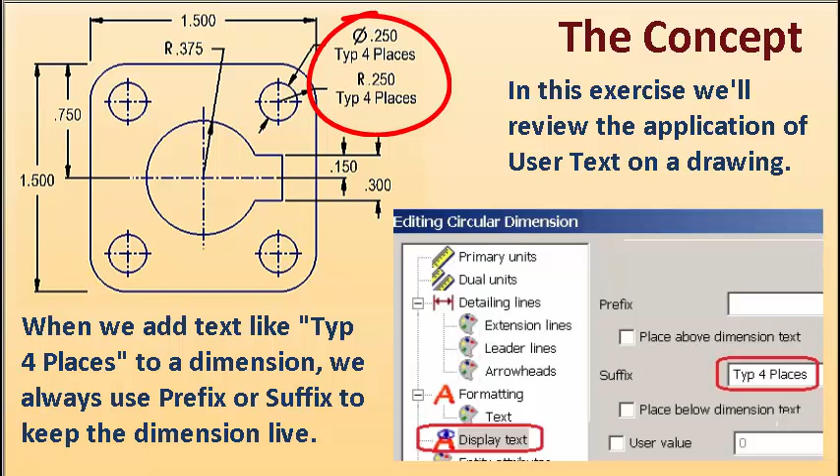In this exercise, we'll review the application of user text on a drawing. When we add text like Typ 4 Places to a dimension, we always use prefix or suffix to keep the dimension live. We would not employ user text in these cases. We'll look at an example where user text would be an ideal option.

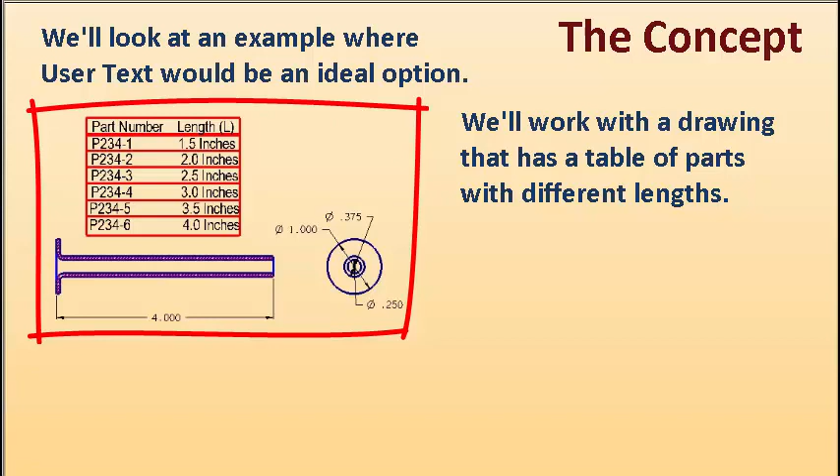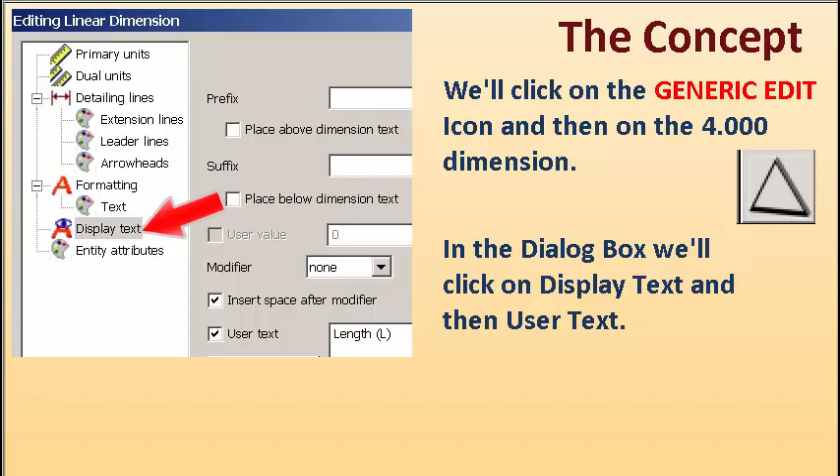We'll work with a drawing that has a table of parts with different lengths. We want to replace the dimension 4 with a phrase length (L) to match the column heading in the table. We'll click on the generic edit icon and then on the 4 dimension. In the dialog box, we'll click on display text and then user text.

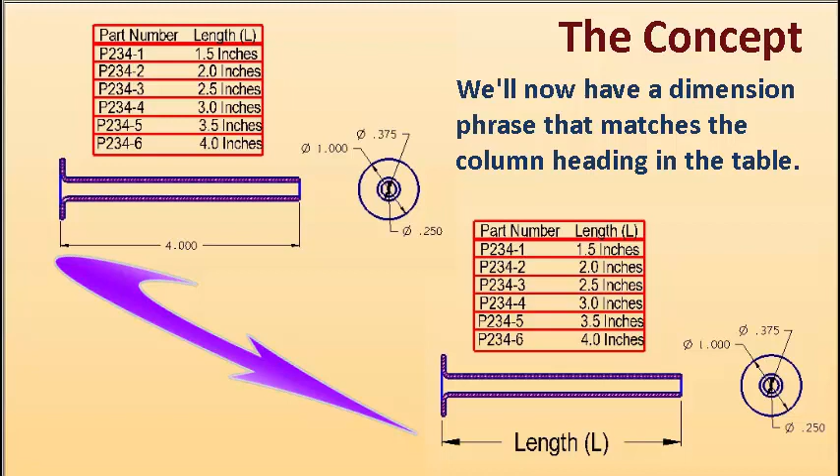We'll type length (L) in the field and click on OK. We'll now have a dimension phrase that matches the column heading in the table. So let's work with an actual file. We'll open up sample file KCV drawing 11.ckd.

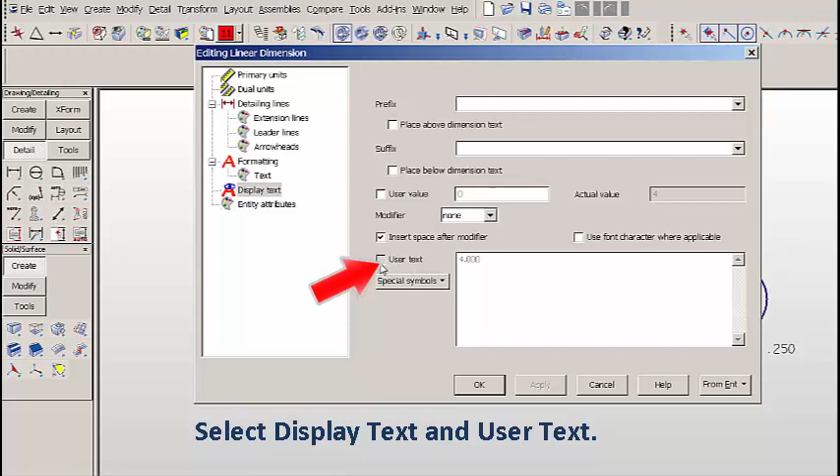Let's click on the generic edit icon and then on the 4 dimension. We're going to select display text and then select user text. And we'll type our phrase length and then in parentheses the capital letter L. And then click on OK.

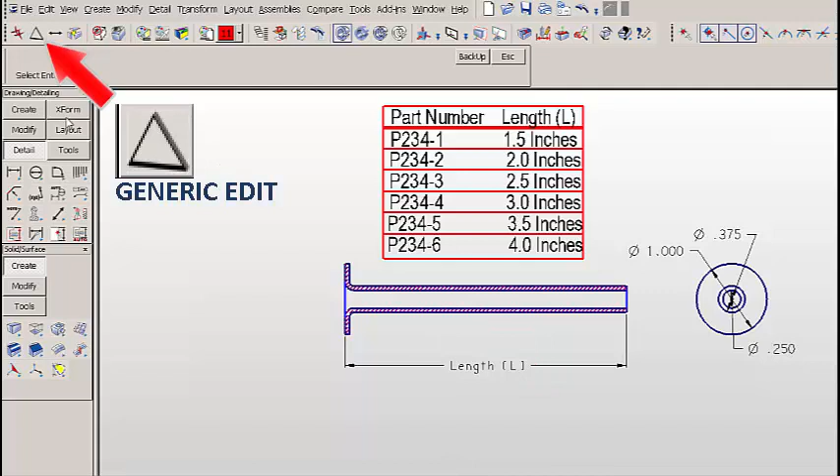And you'll see that the 4 has been replaced with that phrase. Now at that time we could have edited the formatting, but just in case you go back later and say, gee, let me select that dimension with generic edit.

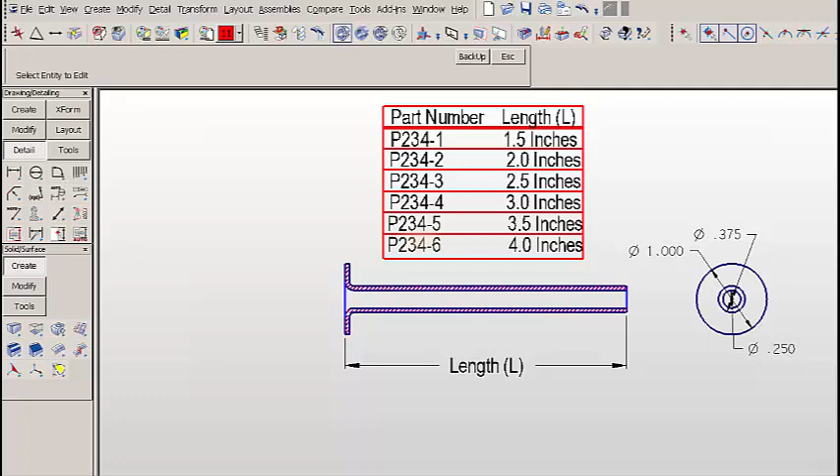Let's go to formatting. And you know how on a table you might want to have that scripted at a larger, thicker value. We'll use Arial filled just so it stands out on the drawing. And now we've got a nice label there that references the column in the chart. So let's go back and recap.

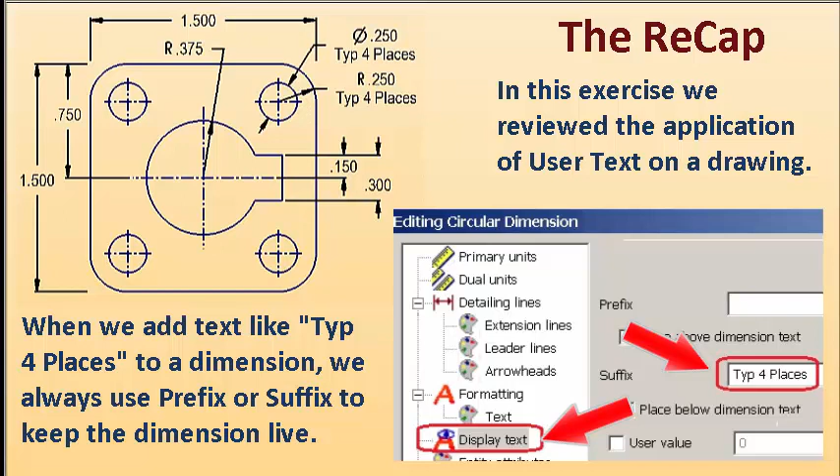In this exercise, we reviewed the application of user text on a drawing. When we add text like typ 4 places to a dimension, we always use prefix or suffix to keep the dimension live. We would not employ user text in these cases. We looked at an example where user text would be an ideal option. We worked with a drawing that had a table of parts with different lengths.

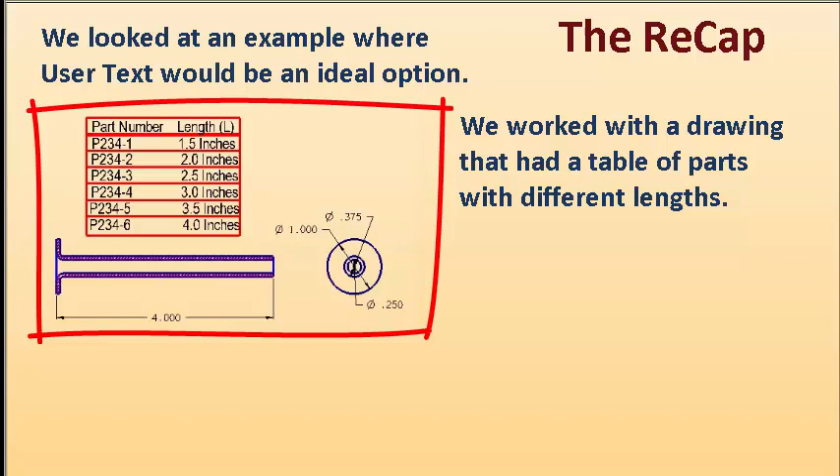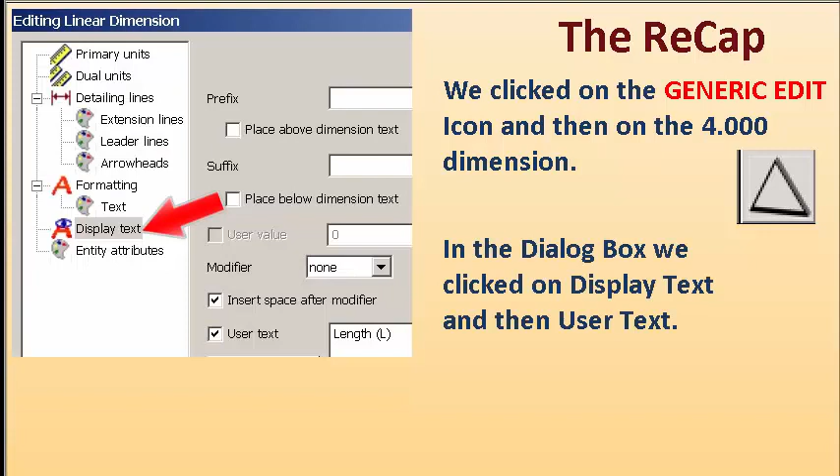We replaced the dimension 4 with a phrase length and in parentheses the capital L to match the column heading in the table. We clicked on the generic edit icon and then on the 4 dimension. And in the dialog box, we clicked on display text and then user text. We typed length (L) in the field and clicked on OK. This created a dimension phrase that matched the column heading in the table.